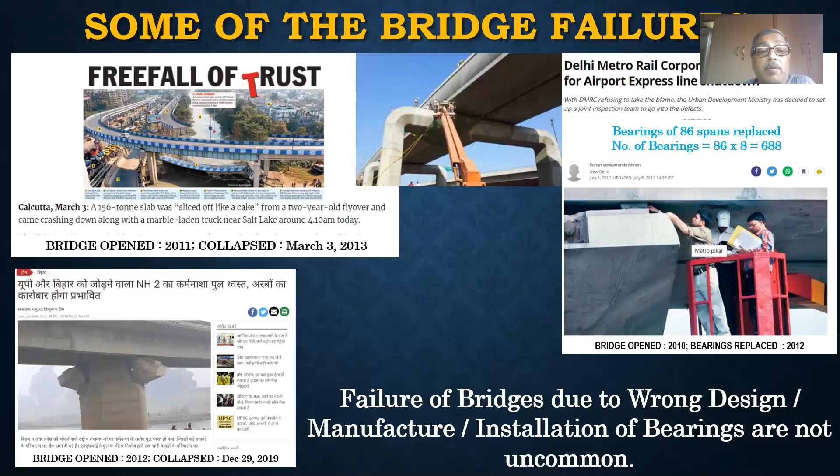Before I get into bearing failures, let me just gloss over the certain basics about bridge bearings.

The main function of the bridge bearing is to accommodate translation and rotation caused by the in-plane and out-of-plane movement and rotation of the superstructure due to various loads. Bearings transfer vertical and lateral loads from the superstructure to substructure and foundation, while releasing the translations and rotations. That is the main function of the bearing.

Vertical load will get transferred whether you have bearings or not. As an example, in buildings, we do not provide bearings in the majority of cases because the spans are of the order where the rotations and lateral loads caused by deformation are not so significant. But in bridges, where the spans are long, the rotations and translations are going to have significant effect on the substructure and foundation in case you do not release those deformations. And that is why the need for bearings.

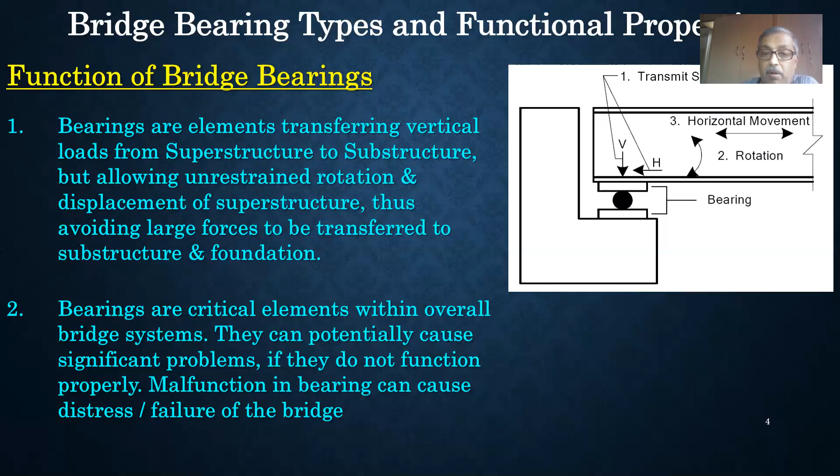The types of bridge bearings are many. Since the middle of the last century, many modern bearings have come in. Prior to that, most bridges used metallic rocker and roller bearings, but today rocker and roller bearings are becoming out of date, and other modern bearings called HLMR, that is high load multi rotational bearings, like pot bearings, disc bearings, spherical bearings, have come into existence and are performing well. We also have elastomeric bearings, which are very popular for short and medium span bridges.

And then we have special bearings, which are uplift bearings or restraint bearings, which help in better seismic resistance. And you also have isolation bearings, which are quite popularly used.

One thing I wish to tell you now is that the modern bridge bearings are far more complicated structures as compared to the historical ones. This is because, due to technological and scientific progress, these bearings can take much higher loads for a much smaller size, and therefore the stresses are quite high.

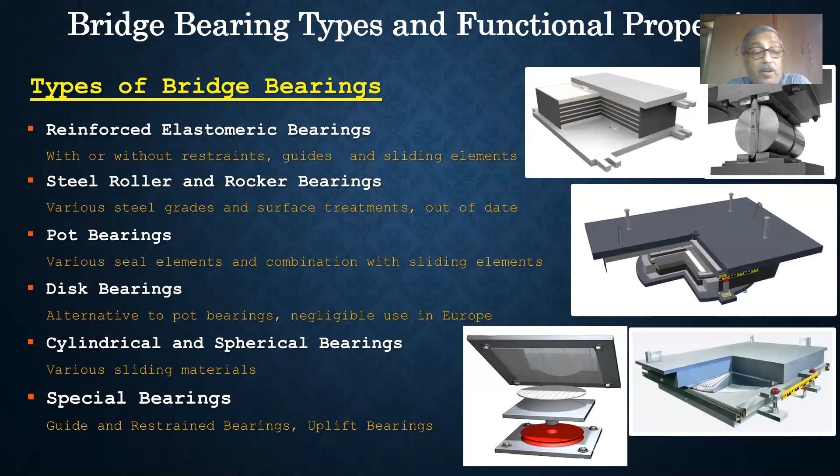Now these displacements can be achieved at the bearing locations by three mechanisms: one is sliding, one is rolling or rocking, and the third is deformation. A sliding mechanism would mean the provision of a sliding element like PTFE or UHMWPE, or any sliding material, by which the top part of the bearing, connected to the superstructure, will move without offering any resistance as compared to the bottom plate.

The second mechanism for displacement is a rolling mechanism, which is the concept used for rocker and roller bearings, where the top plate rolls over, and in the process the movement is allowed, and the roller also moves half the distance as compared to the movement of the superstructure, with the substructure being rigid.

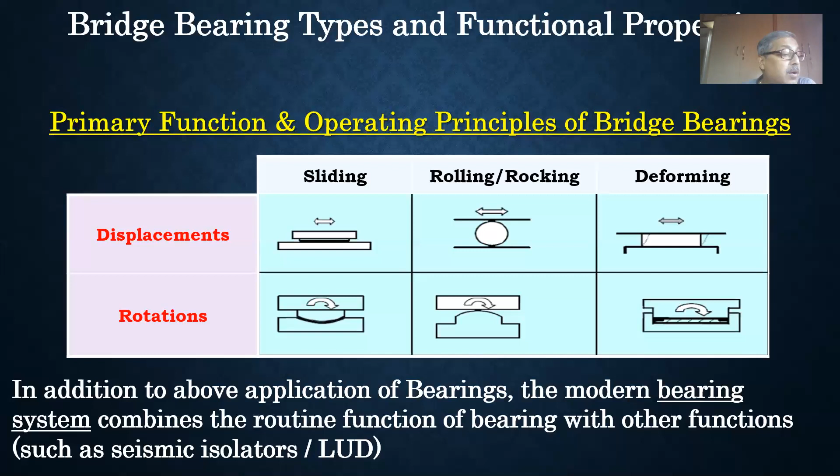These bearings were manufactured and fabricated in Germany under strict quality control. One problem with such size bearings is that they can never be replaced, unlike conventional bearings which are designed for replacement. So these bearings have to have the same design life as the existing bridge, and maybe a little more. Therefore, a very high level of quality control and precision is required in manufacture, installation, and maintenance of these bearings.

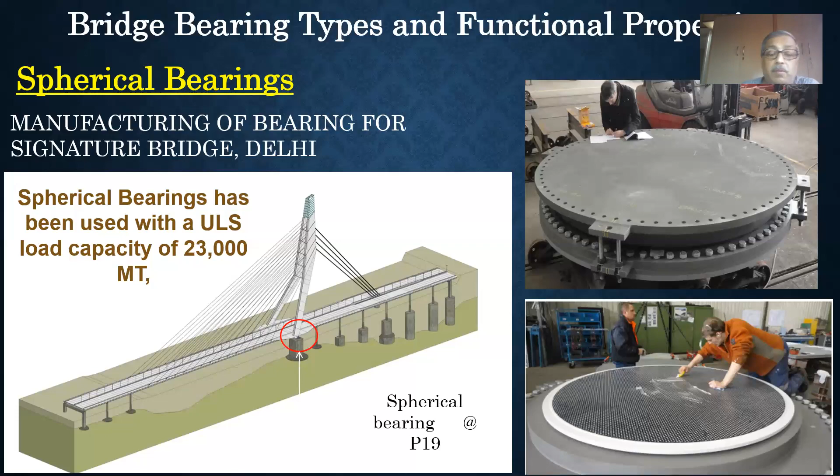Why should bearings have a higher margin of safety? I think this is an important point. Bearings, as we all know, are vital elements, and the cost of bearings is actually minuscule compared to the total cost of the bridge. Therefore it is always prudent to be a little liberal in designing bearings. They should be robust, and many times replacing a failed bearing costs much more than the original cost of the bearing. So bearings should be designed, manufactured, and installed with a lot of margin, so that there is no scope for error.

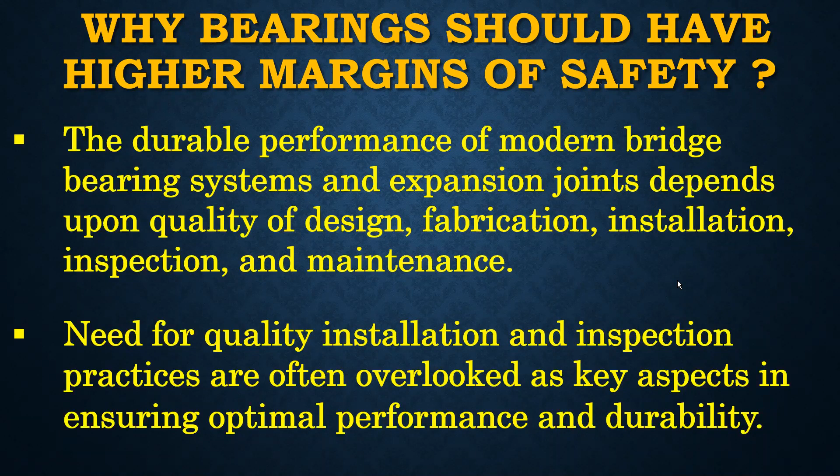The need for quality installation and inspection practices is often overlooked, and this is the main problem because of which bearings become the reason for failure of bridges many times.

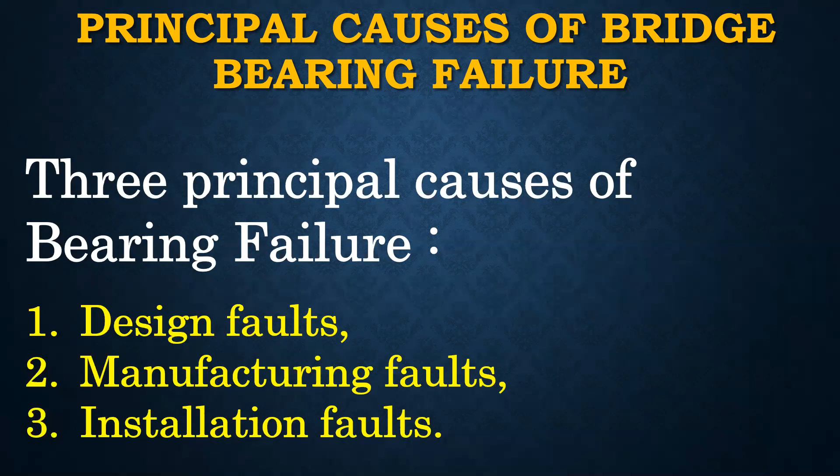Now let us come to the details of my presentation. The principal causes of bridge bearing failures can really be divided into three groups: one is the design fault, second could be the manufacturing fault, and third is the fault due to faulty installation.

Now let us come to the design fault. This could be primarily due to three reasons. One is lack of experience on the part of the designer and reviewer. Unfortunately, not many literatures and books are available in the market which explain in detail the do's and don'ts in case of bearing design. So there is a fair chance that the design forces, movements, and rotations are underestimated by the designer, which results in faulty design of bearings.

Incidentally, the design of the bearing is done by two independent organizations. One is the design done by the bridge designer who is involved in the bridge project; he or she estimates the design forces, movements, and rotations, and prepares the bearing layout. This drawing is passed on to the bearing manufacturer or vendor, who does the detailed design of the bearing, and based on this detailed design, the bearings are manufactured and installed.

The second possibility could be improper choice of the bearing type itself, meaning the layout of the bearing is faulty. Also, a faulty bearing layout in the plan of the bridge structure can cause serious issues.

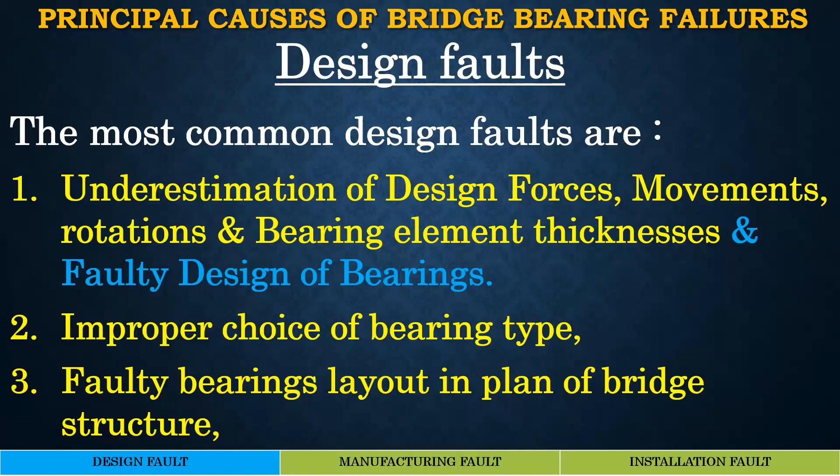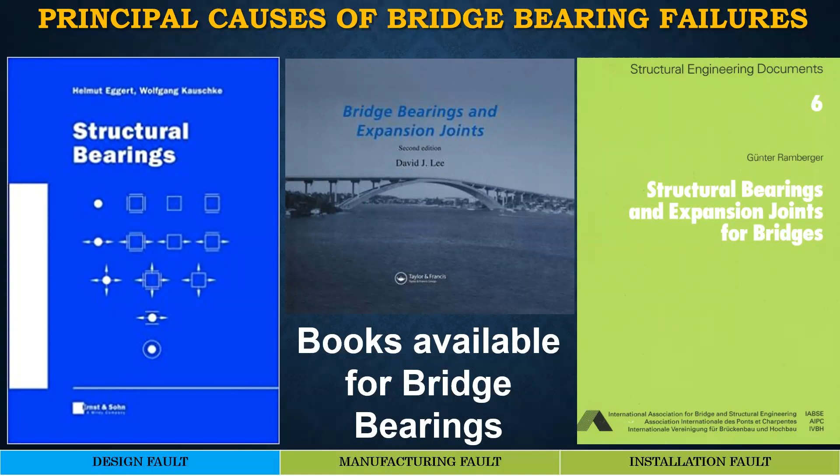So, regarding underestimation of design forces and dimensions, there are many good examples. One good example is the collapse of Surat flyover, a classic example of wrong design, which led to failure during construction itself. This flyover collapsed in June 2014, killing about 10 people.

It was a simply supported curved bridge of very sharp radius. The first mistake was to have a simply supported span for such sharp curvature - that is not recommended at all. When you have a curved span, normally the good practice is to have a continuous structure rather than a simply supported one.

But having conceived it as a simply supported structure, the design should have ensured equilibrium and correct estimation of forces. In this case, after the collapse, detailed investigation revealed that the designer simply designed this curved bridge as a straight bridge, calculated the forces, and at the end added 25% to account for curvature.

This is a gross error because the behavior of a curved structure is entirely different from a straight bridge. In the curved superstructure, the forces in the bearings were coming out negative, meaning you had to anchor the bearing - provide a tensile bearing to hold it against toppling. Instead, designing it as a straight bridge gives compressive force, and adding 25% means you've provided a completely different type of bearing than required.

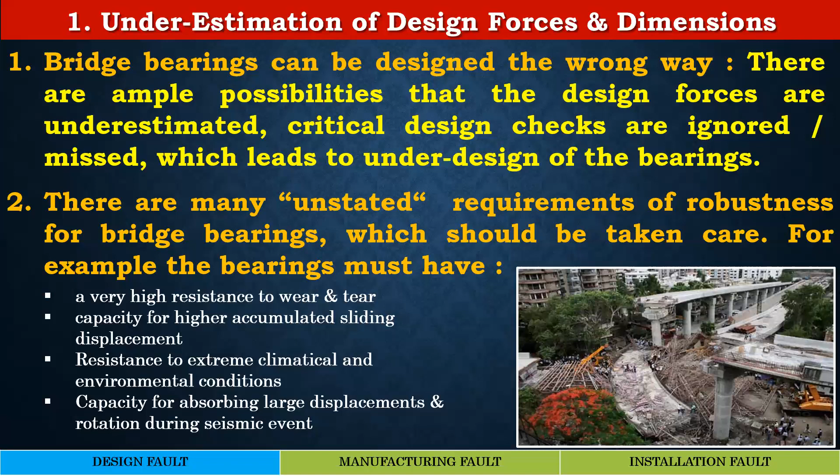Another example is long span bridges, particularly where you have a central hinge. Oftentimes I found the estimation of rotation for the design of bearing is underestimated. When you have a central hinge for a long span bridge, it has to cater for double rotation - rotation from the two ends - and these rotations must account not only for live loads but also the creep effect of dead load, pre-stress, etc.

This calculation is quite complex. In many occasions, I found these calculations to be grossly in error, and proper estimation increases the rotation by many fold. So it's very important that these are assessed properly.

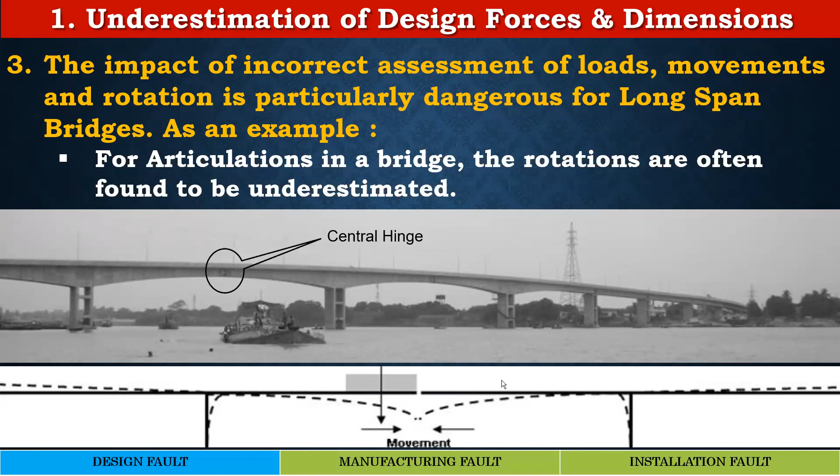When it comes to long span, I'm again showing you slides of Signature Bridge Delhi, because in bridges of long spans, the forces and rotations are of very high magnitude. The chances of error are also very high, and considering the sensitivity of this element, as the span increases or as the load on the bearing increases, the degree of checking and review required increases in the same proportion.

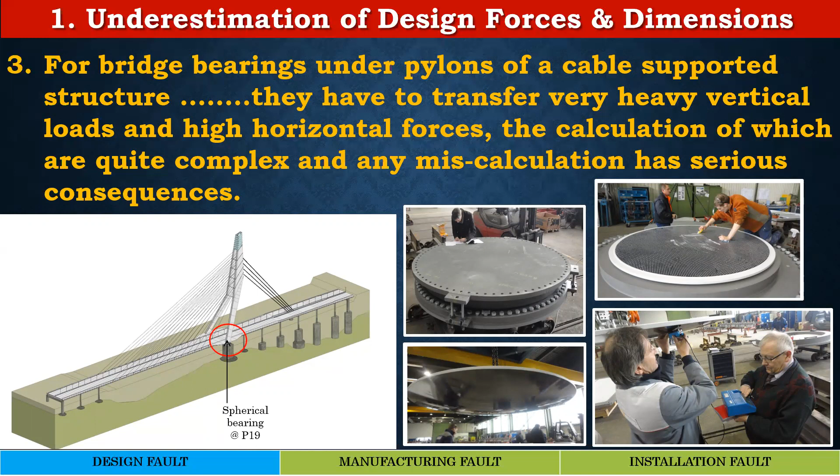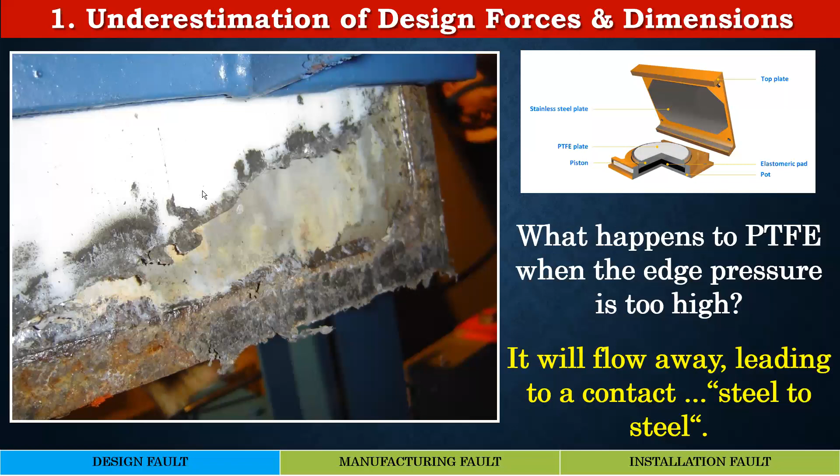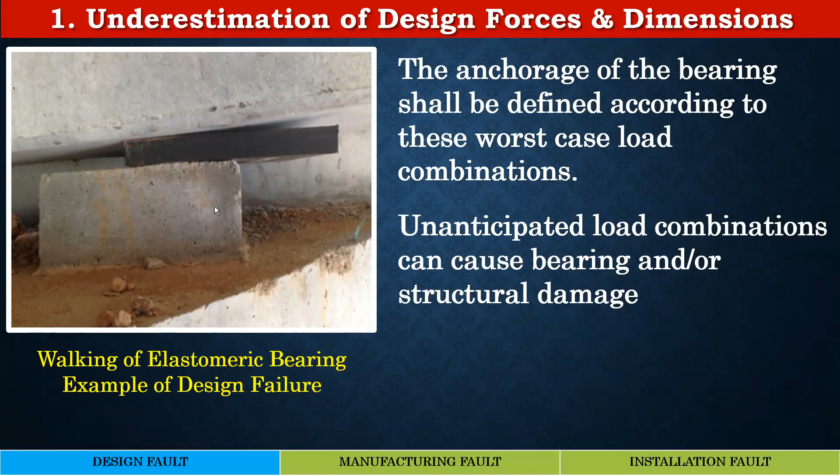This is another example of underestimation of design force leading to failure. Here you can see the elastomeric pad simply walking away. This happens when the minimum load is very low, and the friction between the elastomer and concrete depends on the vertical load - the lower the load, the less the friction. So this is a scenario where if you overestimate the minimum load, there's a problem of the elastomeric bearing walking away, and this is one such example.

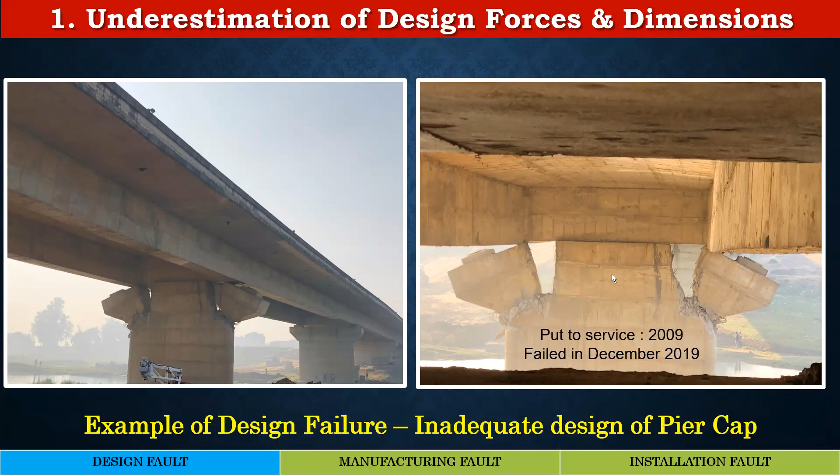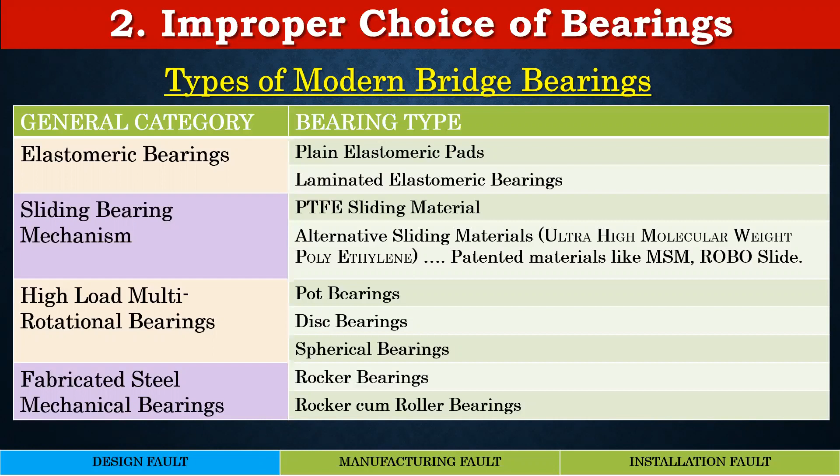The types of modern bearings can be broken up into three parts. One is the elastomeric bearing. Every kind of bearing has its own range of application - for example, elastomeric bearings are meant for short and medium span bridges. The second category is the high load multi-rotational bearings, which comprise pot bearings, disc bearings, or spherical bearings. They are used for medium and large spans across a wide range of load brackets. The third is the metallic roller and rocker bearings, which have limited application in today's scenario.

The choice of bearing depends on many factors, like the type of structure - whether it is highway or railway - what is the total magnitude of vertical load, maximum and minimum, what is the maximum rotation, and what is the horizontal displacement, environment, economics, and structural arrangement.

There are many examples of bridges where the wrong choice of bearing has been adopted, which subsequently led to problems. As an example, in all the recent expressway projects in India, spherical bearings are abundantly used even for short spans of 15 meters, 12 meters or so. This is being done since one of the IRC manuals for 6-laning expressways mentions a design service life of 50 years for bearings. I think this is not the correct application, and depending upon the span and the load, the appropriate bearing should actually be chosen.

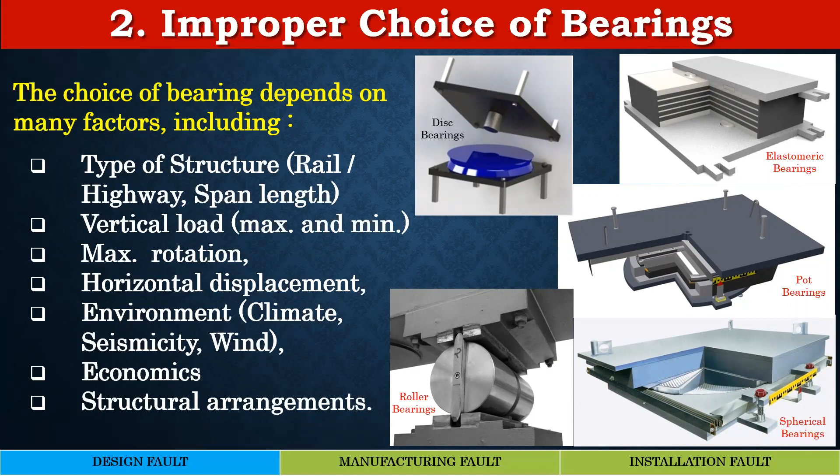This is one guideline which tells you what kind of bearings should be selected under what circumstances, for what vertical load range and what capacity. It's a fairly good table which helps beginners decide on the type of bearing to be proposed, depending upon the vertical load range, the rotation, the translations, and the geometry.

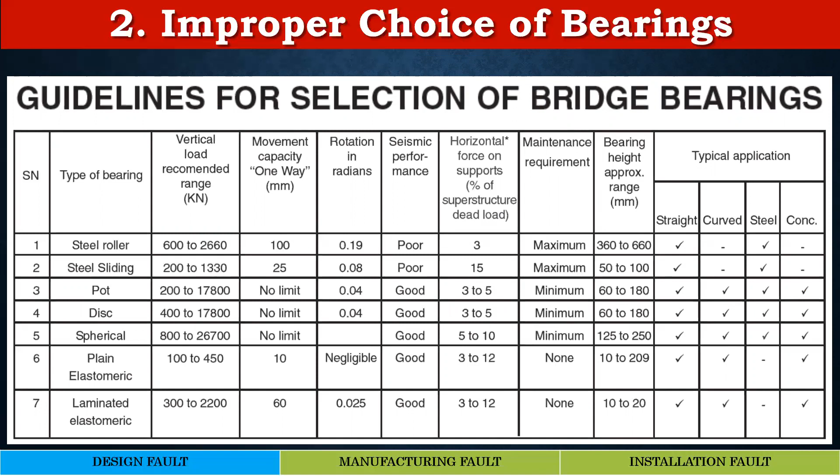Now let me come to the faulty layout plan of bearings, which could be one of the reasons for failure. There are several bearing layouts. Let me first start with simply supported spans - there are several bearing layouts for simply supported spans which are in practice. Not all of them, however, are desirable, and some suffer from serious drawbacks.

Unfortunately, we do not have any guidelines so far in IRC which guide the designer in choosing a particular type of bearing layout, and it is all left to the ingenuity and experience of the designer performing the design. The fundamental principle in fixing the bearing layout is essentially to ensure that the load transfer from superstructure to substructure is symmetric and the locked-in stresses are reduced to a minimum.

You can see there are so many possibilities that exist. For example, if you have a narrow deck - meaning a 2-lane or 3-lane bridge - you will normally have two bearings on each line, one at the fixed end: a fixed bearing and a metallic guided bearing. On the other end, the free end, you will have a metallic guided bearing and a free bearing. This is one possibility. Another possibility is to have the vertical loads taken by 4 sets of bearings, with the lateral load segregated using a pin bearing and a metallic guided bearing. A third option could be to have a free bearing instead of a guided bearing on one side. Now let us go into the details as to which one should be done.

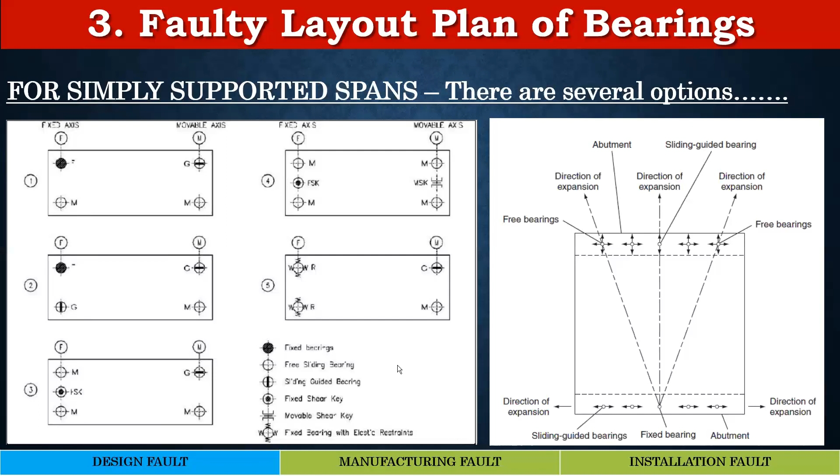Let's take the case very often used by many designers without questioning: a layout where a fixed bearing is used at one end, and a metallic guided bearing, which allows translation in the transverse direction, is used here. On the free end, you have a guided bearing which allows longitudinal translation, and a free bearing. Now this is a very classical approach, but it suffers from some drawbacks. Number one, the sharing of lateral load between the two bearings is never uniform, because the fixed bearing and the guided bearings have different tolerances, and therefore when the lateral load comes, the share is never equal.

All the loads will be taken by the fixed bearing, and only when there is a deformation of the fixed bearing will the other bearing start effectively sharing the load. So this is one drawback. The second drawback is that horizontal forces in the cross direction due to wind or temperature difference can cause horizontal restraint forces where the deflected pattern is not symmetric, and this is also a disadvantage.

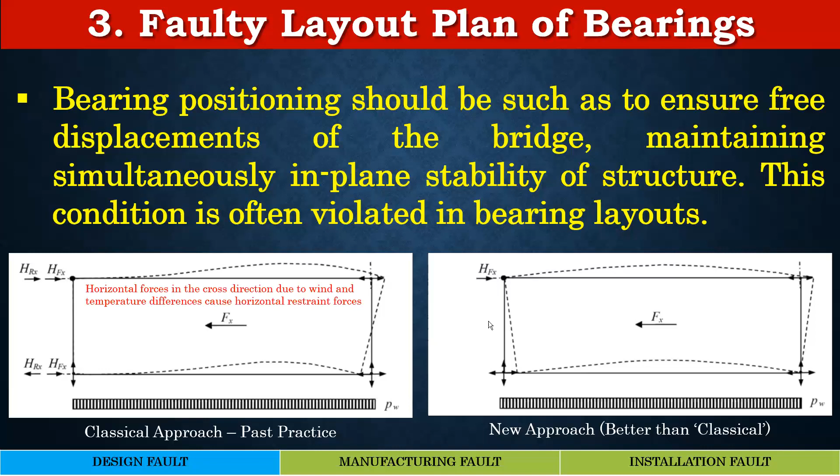The best solution would be to have free bearings at the ends and a central pin bearing and a metallic guided bearing. In the previous option, if you have the entire lateral load taken by the fixed bearing, this will lead to some torsional forces in the substructure and foundation, which is not desirable. But in this case, you can probably avoid the torsion in the substructure and foundation. So this is a better option.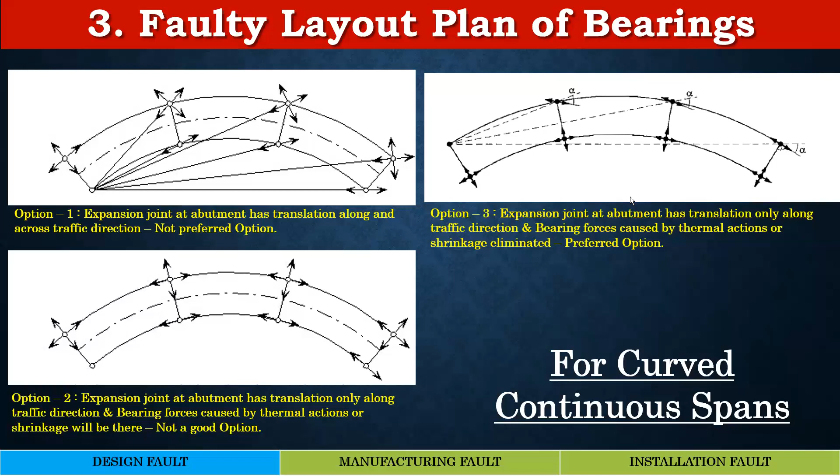Another problem we face in bearing design is the faulty fixing detail of the bearing. We have seen on many occasions that the designer simply designs the bearing, and when it comes to the detailing of the superstructure at the junction of bearing and superstructure, or detailing of the pedestal, the interface is simply forgotten about. This is a very serious issue.

So the lesson learned here is that the designer of the bearing must also ensure that the connection of the bearing to the superstructure and the pedestal duly takes into account the fixing arrangement of the bearing with the superstructure and the pedestal.

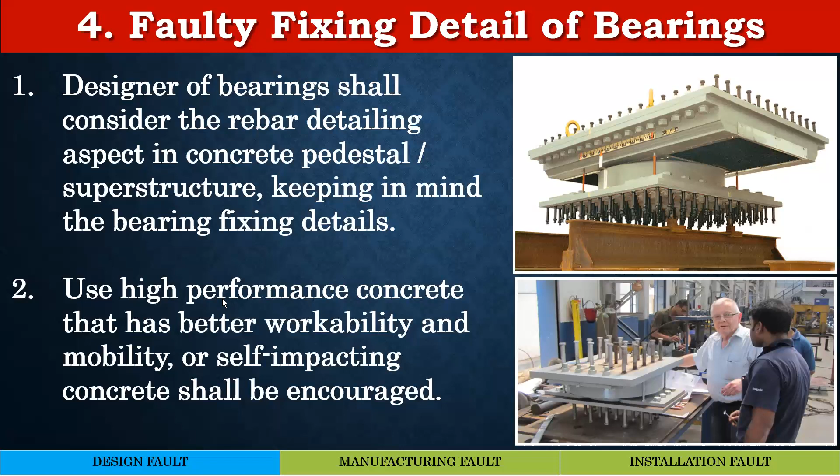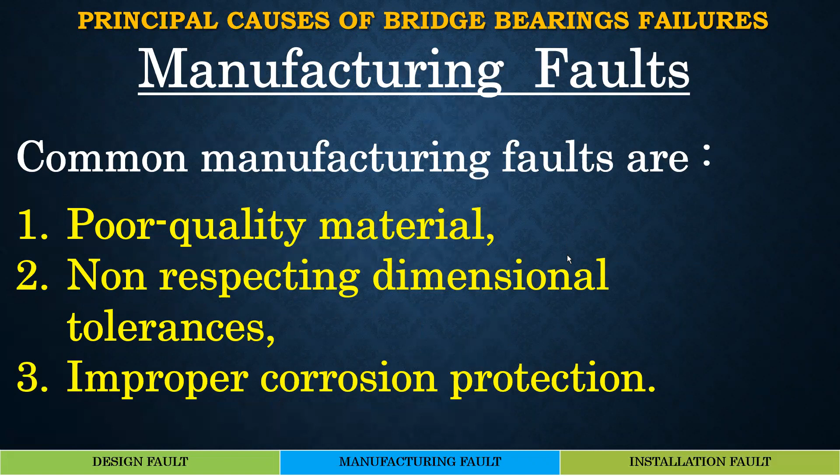Now let us come to the second part, which is the manufacturing fault that causes bearing failure. Manufacturing fault can be because of poor quality of material, non-respecting dimensional tolerance, or improper corrosion protection. Poor quality of material refers mostly to elastomeric bearings, which are made of compounds containing a great variety of components. As far as metallic bearings are concerned, the quality issues of the material per se do not really come into the picture.

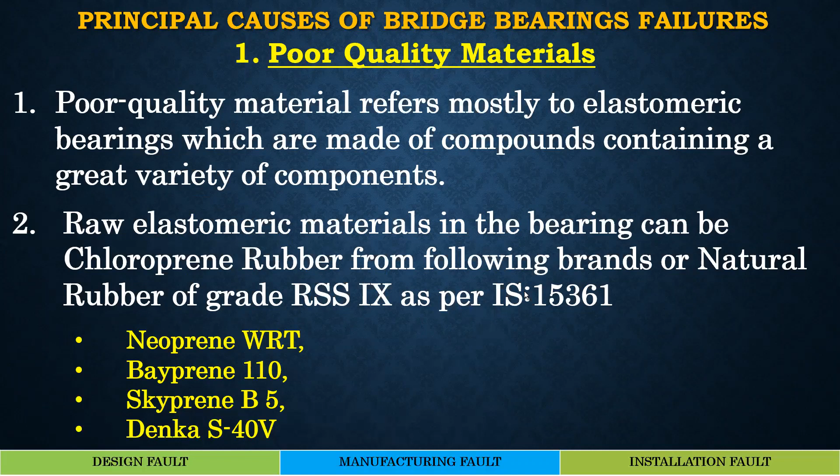Raw elastomeric material in the bearing can be chloroprene rubber or natural rubber of different grades, as mentioned in the code. The effective use of rubber as an engineering material depends on understanding its behavior and chemical composition. Unfortunately, we as structural or bridge engineers have very little idea about rubber technology, whereas elastomeric bearing manufacturing involves a lot of rubber technology, where the properties we achieve depend on a complex composition of materials combined here, but that is an area which is Greek to civil and structural engineers.

What we need to understand regarding elastomeric bearings is that it's a viscoelastic material. It is neither elastic nor plastic, and we need to know a little bit about what viscoelastic material is. Normally the steel and concrete we deal with in the normal force-stress range are elastic. That means within the elastic range, stress is proportional to strain, and when you release the force, it comes back with no plastic deformation.

If it is a plastic material, when you release the force, there is no regain of the strain, and the strain is permanent. When you talk of elastic-plastic material like metals, once the yield point is crossed, if you release, there will be some permanent strain, inelastic strain.

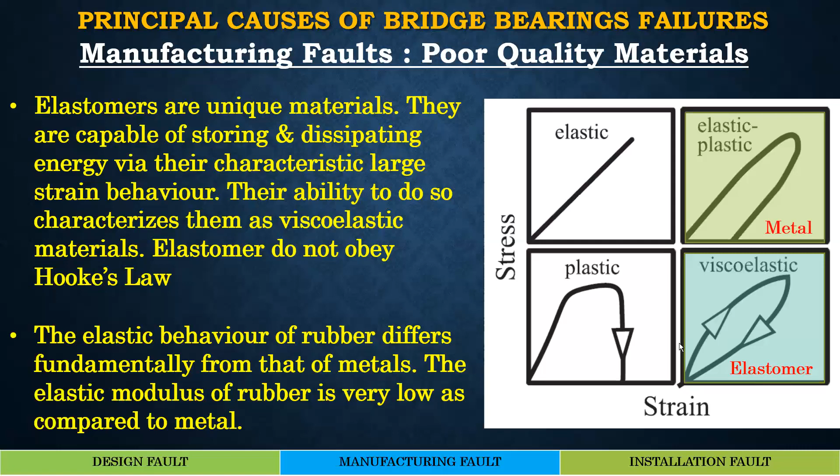Elastomers are a complex polymer compound which has mechanical properties that are sensitive to changes in compounding and vulcanization process. They are flexible in shear and in uniaxial tension or compression, but very stiff in its volumetric deformation. The material properties are non-linear and time-temperature dependent. Thus, factors such as creep and low temperature stiffening are important to the designer.

The problem with elastomer bearing manufacture is that they have a large mass of rubber, and it is difficult to get a uniform cure throughout the cross section. The vulcanization process has to be very controlled. If it is too long, the outer edges of the pad become brittle due to overcuring. Conversely, if the curing process is cut short, the center of the pad remains uncured, resulting in excessive deflection under sustained load.

Now, the elastomeric bearing is one such material which, if done properly, is in fact one of the best bearing types, which has very good resistance against earthquake, and therefore I would strongly recommend use of elastomeric bearing to the maximum extent possible, as long as you are able to satisfy all the requirements.

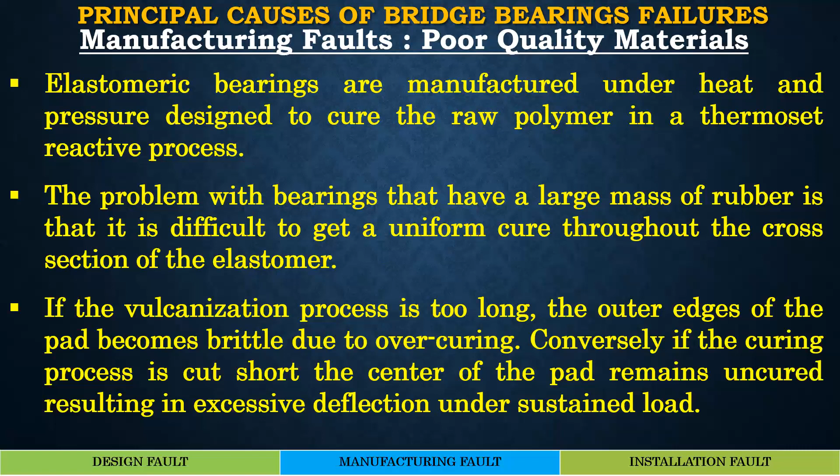Bottom line, as far as structural engineers are concerned, because we are not rubber technologists, we structural engineers only understand the few physical properties which influence the behavior of elastomeric bearing. So we only see the end product and compare its hardness, its tensile strength, its elongation at break, and compression set, and decide whether the elastomer is performing or non-performing. So these are the end requirements of structural engineer from the elastomeric bearing. But I would wish that a bit of rubber technology, structural engineers involved in bearing design should know, because that helps them to inspect and accept or reject a material.

When you are selecting a raw material, when you are inspecting the quality assurance or factory production control, or accepting the bearing, a little bit of knowledge about the technology of rubber and composition helps a great deal.

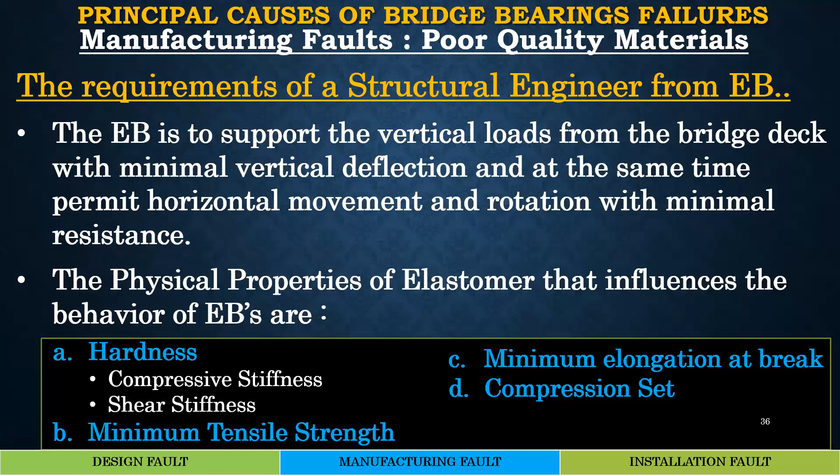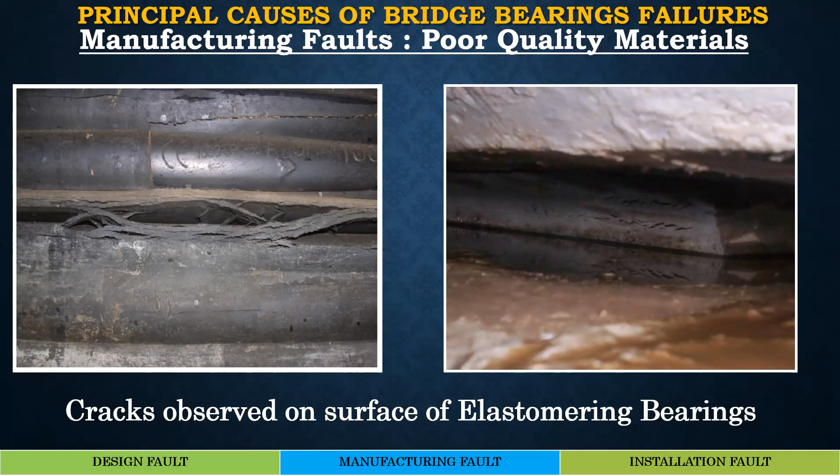Coming to the failure of non-respecting dimensions and tolerance for metallic bearings, we can see that non-respecting dimensional tolerance is a common fault in case of metallic bearings. Some tolerances are very important for reliable bearing behavior. They concern mostly the mechanical bearings.

The gap in the PTFE sheet recess should not exceed 0.6 millimeter in common situations. Otherwise, the PTFE sheet can be easily extruded from its recess during the bridge span movement, as you can see in this particular sketch. Very important in the bearing sliding element is proper choice of PTFE sheet, lubricating agent, and respecting roughness limits for sliding surface and mating element.

All that is not covered in great detail in the codes, but I think experienced vendors and experienced inspectors of bridge bearings would know. Many times, due to lack of dimples in the PTFE sheet, and additionally the use of silicone oil in place of silicone grease, the frictional resistance can be as high as 10 times more than the case of properly chosen material, which can lead to failure.

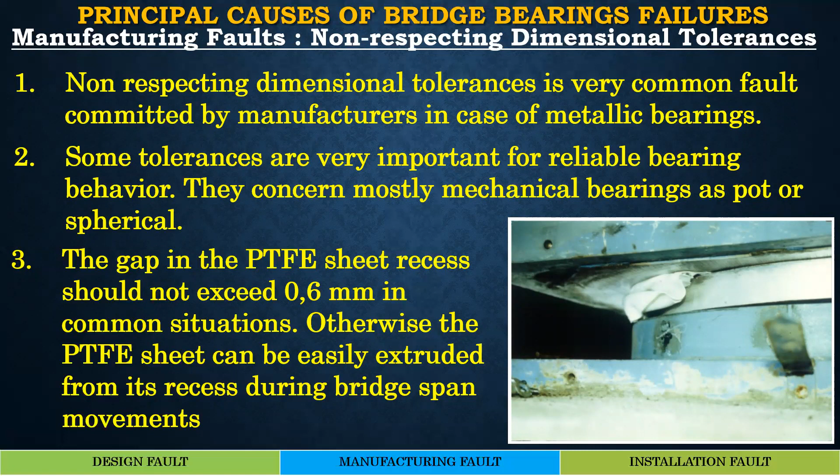Sometimes it happens that the vertical clearance in the guide channel between the central shear key and the upper sliding plate is insufficient, and the shear key is immobilized, and its linking bolts are cut. As PTFE sheet is subject to wear during the bearing movement, its depth becomes lower and lower, and this is a reason why the clearance between these two elements should be designed with sufficient gap.

Otherwise, the elastomer pad can be extruded through the gap between these two elements, as can be seen in these two sketches.

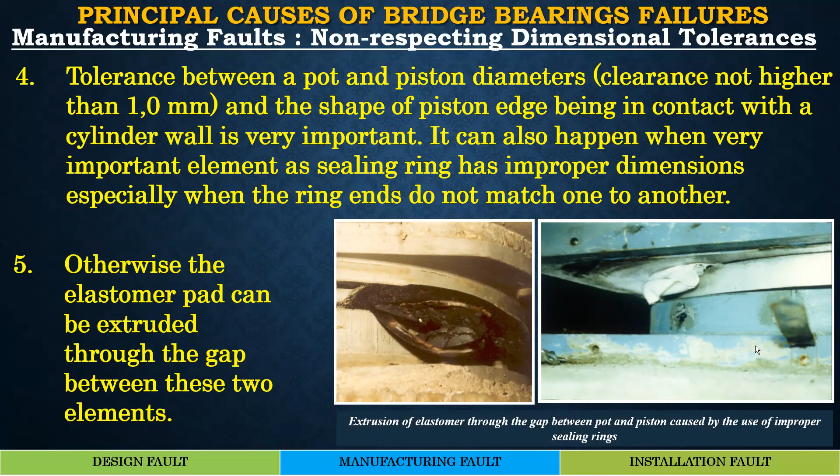There is also a possibility of elastomeric pad extrusion when there is excessive deformation caused by high horizontal lateral forces during construction. As I explained earlier, if proper care is not taken during the construction stage, the bearing forces and lateral loads can increase to a very large extent, and that can cause failure of the bearing during construction stage itself, as you can see in this particular slide.

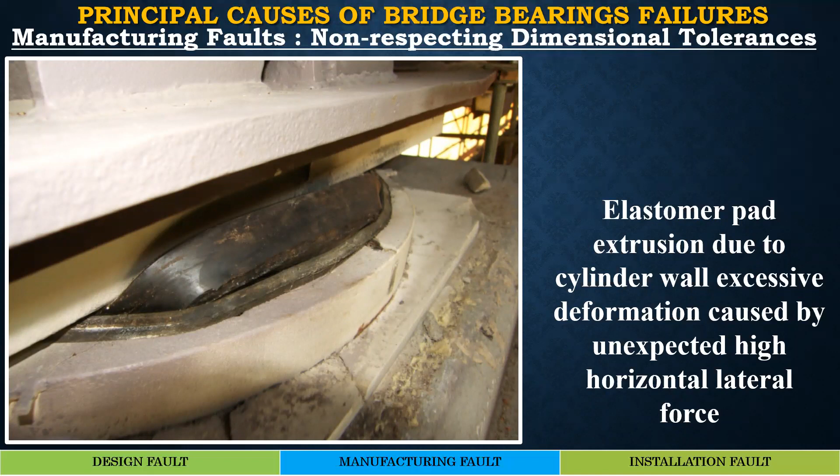Sliding element and sealing ring in pot bearings, as well as shear keys in all guide bearings, are the most vulnerable parts of pot bearing. Many a times

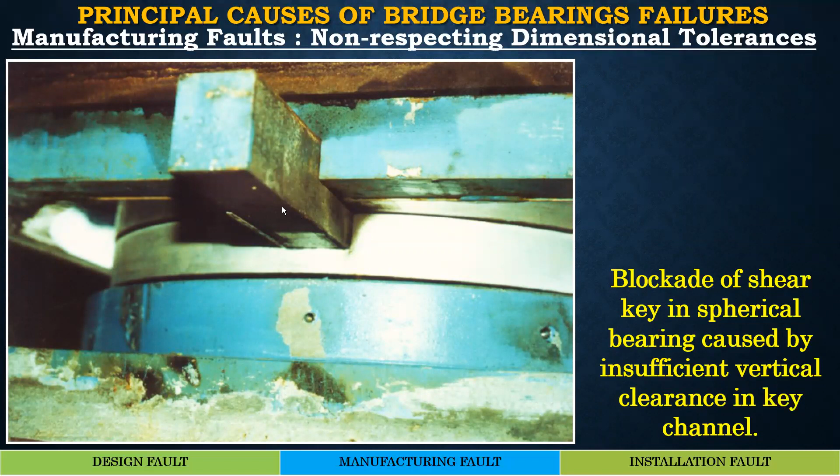there can be locking because of the lack of adequate clearances, which can cause blocking of the shear key. What you see here is that there is no gap. There should be a gap here to allow free sliding of the top plate with respect to the bottom plate. This is not happening here because adequate clearances are not given.

Now, coming to corrosion protection, this slide shows that the painting in the superstructure and the pedestal has covered the elastomeric bearing also, which is totally unacceptable.

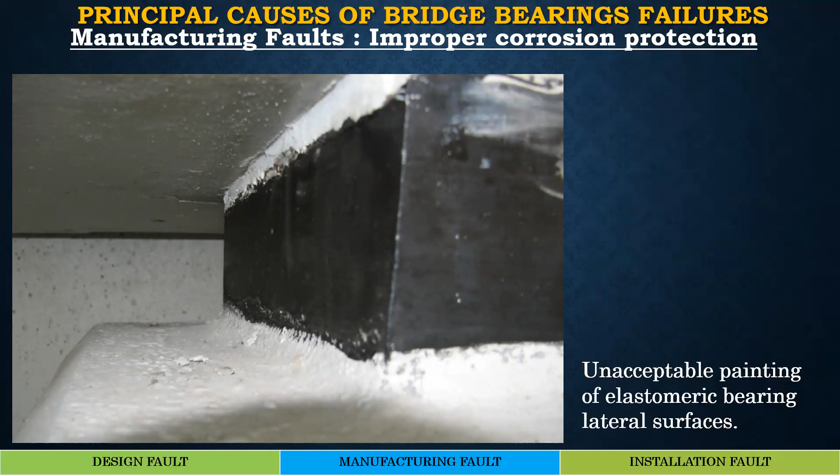For elastomer, every paint cover may be very dangerous for material behavior, especially when it contains aggressive agents for the rubber. Sometimes painting cover is used as a mask hiding cracks on the elastomer surface, and that should be prohibited. One must be aware that when it comes to elastomeric bearings, no painting should be done on top of that, even to hide anything, and that is completely strict no.

For metallic bearings' corrosion protection, there are several factors which account for the life of the paint film. Some research in the US has shown that whatever painting we do for metallic bearings, 50% of the life of a paint film depends on the surface treatment, 20% on the thickness of the paint film, 5% on the paint type, and 25% on all other factors such as construction, environment, steel surface conditions, etc.

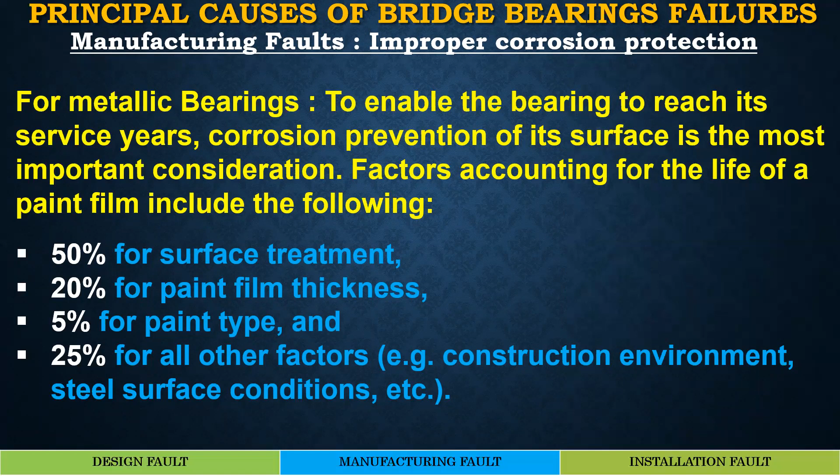Just to give an example, sandblasting is what is conventionally done as a surface treatment for metallic parts, but the recent trend is to provide water jetting, which is far better, and in fact it is a better proposition than sandblasting.

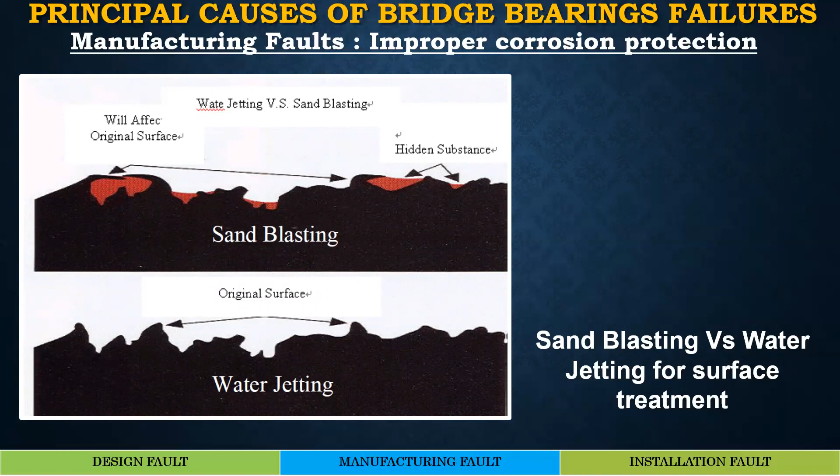These are issues which need to be taken into account in the manufacture and corrosion protection of bearings. Surface treatment using ultra high pressure water jetting employs pressure of about 172 MPa, that is 25,000 psi, and this is a much better alternative than use of sandblasting.

Coming to the last part, which is installation faults, there could be several reasons for faulty installation: lack of clamping device or leaving the clamping device after installation, installation of bearing before completion of the bridge structure, lack of bedding material, wrong installation and non-respecting installation tolerances, non-parallelism of contact surfaces, wrong pre-setting of bearings. These are the seven reasons.

These are common installation faults, which if we can avoid, we can prevent failure of the bridge bearings. So let us go one by one, on this lack of clamping device or leaving the clamping devices after installation. So what you see here is the failure of the bearing due to lack of clamping device.

The pot bearing is an assemblage of various components which is put one over the other, and if they are installed keeping these tolerances as it is, only then it will function. Now the clamping device helps to keep all this assemblage intact. So during transportation and installation, that should not get disturbed. But in this case, because no clamping devices were there, you can see that during the installation itself, half the things are coming out, causing failure.

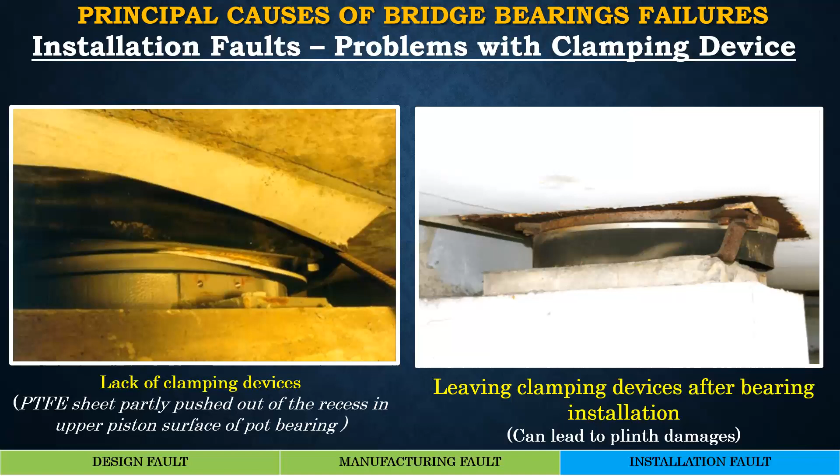These are again some examples of poor installation due to either lack of clamping device or not removing the clamping devices. This is a failure due to wrong orientation and unreleased transportation bolt. You can see leveling and general installation failures here.

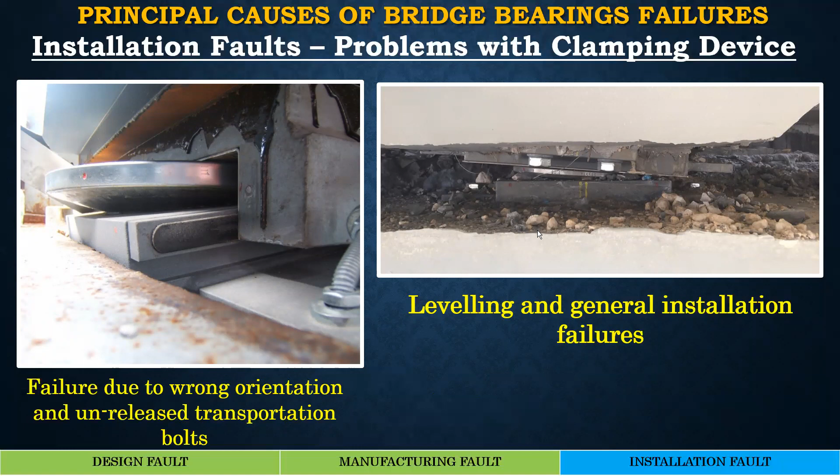This is a fixed bearing which was designed, which was at the abutment and designed for the service stage, where all the other supports were supposed to be free against any translation for temperature movements, etc.

But during construction, this superstructure was on staging, and they were fixed at not one point but another point as well, and due to which the forces were almost 10 to 12 times the design force, and that caused the failure of the system.

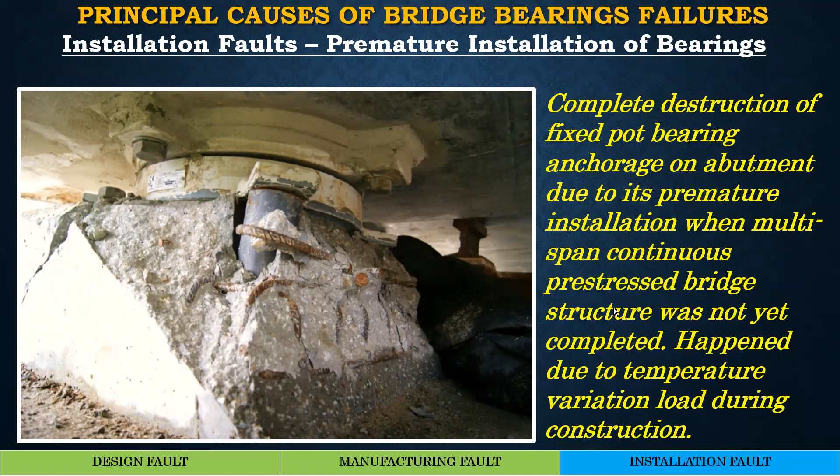This is another very good example of a failure of a bearing during installation. This is a steel concrete composite bridge, 5-span continuous, and the stage of correct construction was that first the steel girders were installed, and then the top deck slab was cast in phases.

Now, unfortunately, the permanent bearings were fixed after the erection of the plate girder, whereas actually the permanent bearing should have been installed later.

But the fallout of this was that during the stage construction, at one point of time when the deck slab was cast up to stage 5, since the plate girder weight is much less compared to the weight of the deck slab, there was an uplift, and the top plate and the PTFE stuck to the top plate got lifted up.

Then before the next load came, there was a temperature variation, and that caused the top plate and the PTFE to move with respect to the bottom plate. And when stage 8 and stage 7 was done, it rested at a different position, causing collapse.

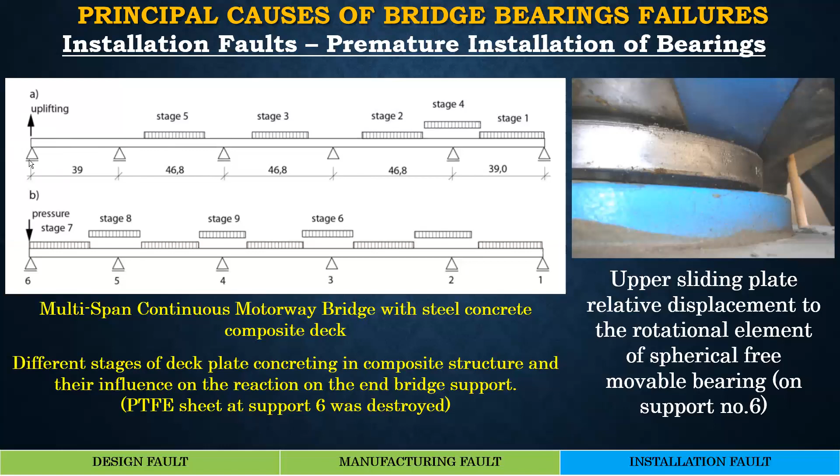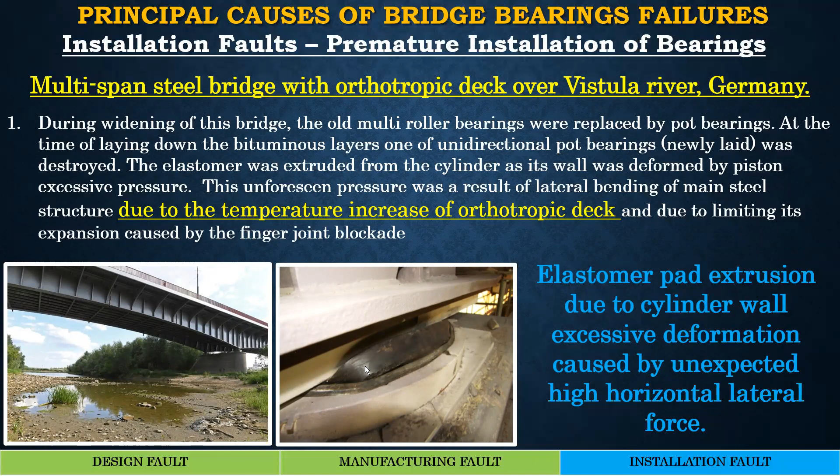This is another failure of the elastomer, I think I have shown this slide earlier also. This is an elastomeric pad extrusion due to excessive deformation caused by high horizontal lateral load during construction. As I mentioned, during construction, if you do not release the forces properly, and if it causes very high forces, then it can cause collapse of the bearing.

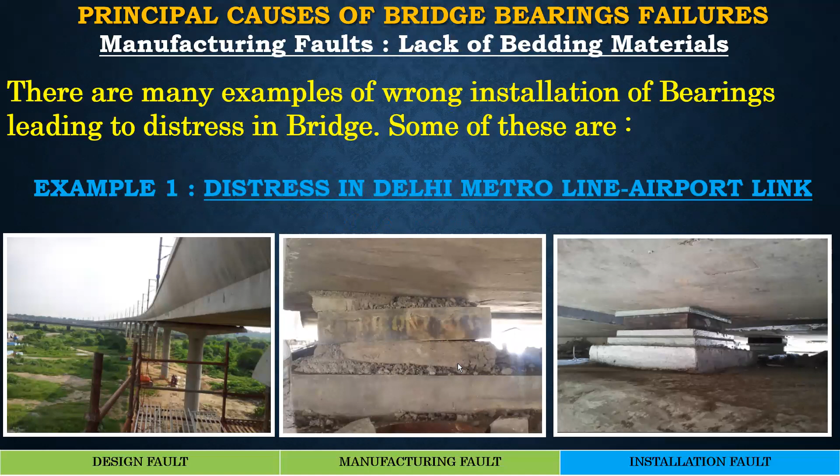Wrong installation and not respecting erection installation tolerances. I think I mentioned the Ultadanga flyover collapse earlier. This is a glaring example of an interchanged bearing causing overturning.

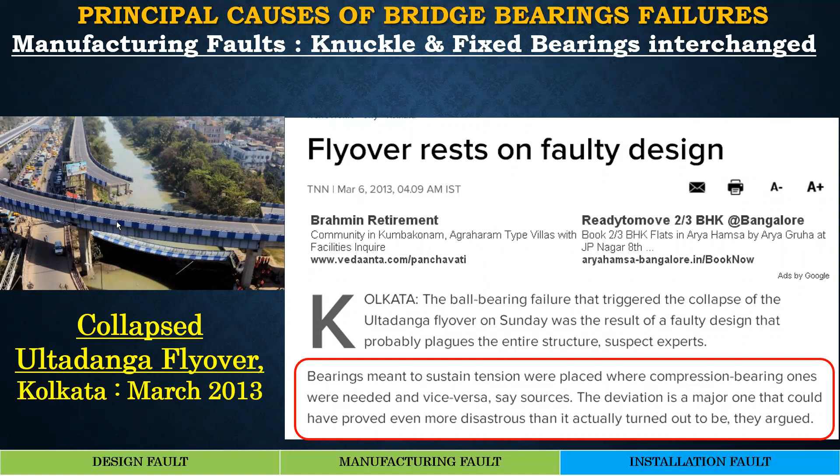Another example is a bridge at Goa, the Gaundalim Bridge, Goa, which I had inspected for some tilting of the top arch. But while inspecting the bridge, suddenly I found that the bearing at the fixed end, which was supposed to be aligned towards the transverse direction, was actually aligned in the reverse direction. These kinds of errors are not uncommon in India, I can tell you.

This shows that there is a need for a very high degree of quality control in bearing installation.

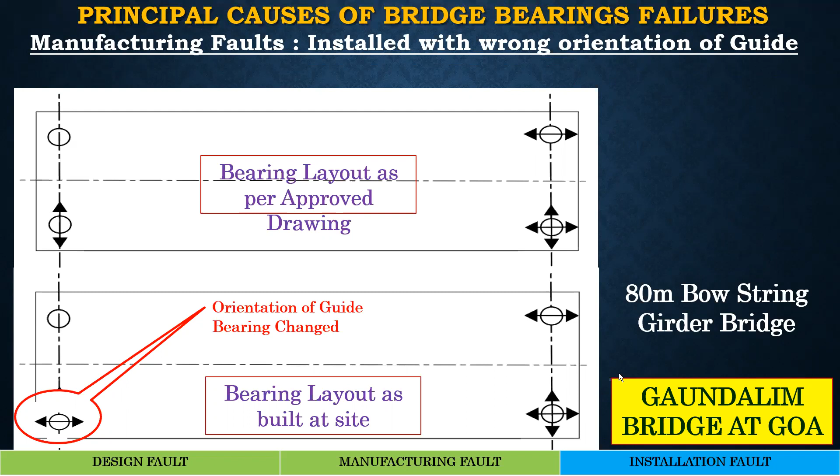It's not just the authority engineer. The drawing shows this only, by the way. It is not a mistake in the design here. It is the mistake of translating the information given in the design at site, and poor supervision by the concerned independent authority engineer.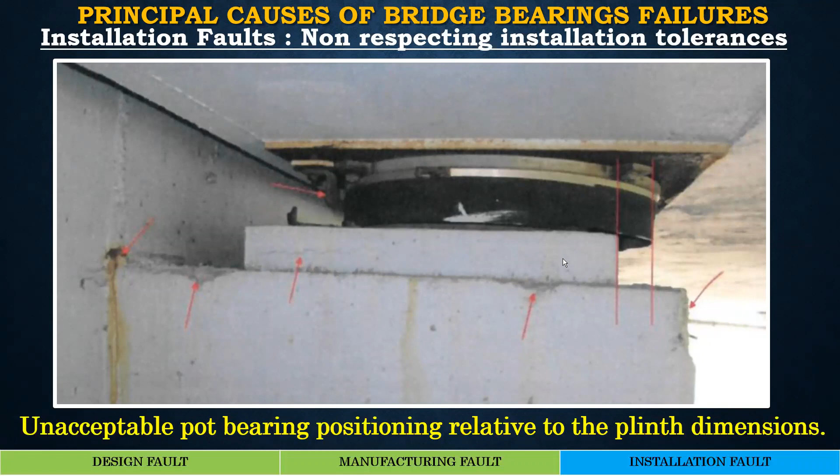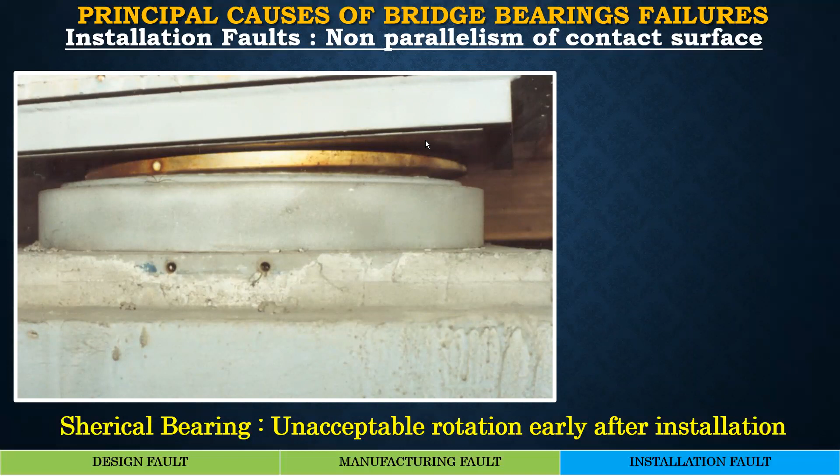Coming to non-parallelism of contact surfaces, spherical bearings - you can see in this slide that if your top and bottom surfaces are not parallel and not leveled, it can cause at the installation stage itself an unacceptable rotation. You can see the top plate is already rotated by a very large angle here, which is unacceptable.

Wrong presetting of bearings. Presetting of sliding element bearings used to be a practice, and I think it is still practiced by some people. It is done to reduce the design movement and range of capacity of the bearings. The top plate of the bearing should be large enough to accommodate translations due to creep, shrinkage, temperature, etc. The inward movement is always larger than the outward movement, because outward movement is caused by temperature alone, whereas inward movement is because of temperature plus creep plus shrinkage.

So therefore, there is always a tendency, in order to reduce the size of the top plate, to do pre-setting - which means that 50% of the movement caused due to shrinkage and creep is absorbed by pre-setting the top plate of the bearing. Now, the risk of pre-setting is that if the installation is done improperly, it can play havoc.

As an example, you can see here this pre-setted bearing, where the top plate has a very large allowance here and a small allowance here, and actually this should have been done the other way around. That means the large gap should have been here and the small gap should have been here, because this is the inward side. So such a mistake in installation can cause havoc.

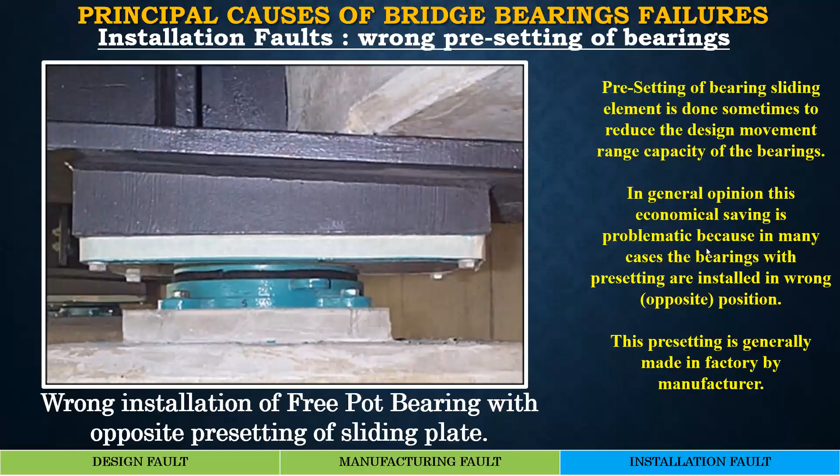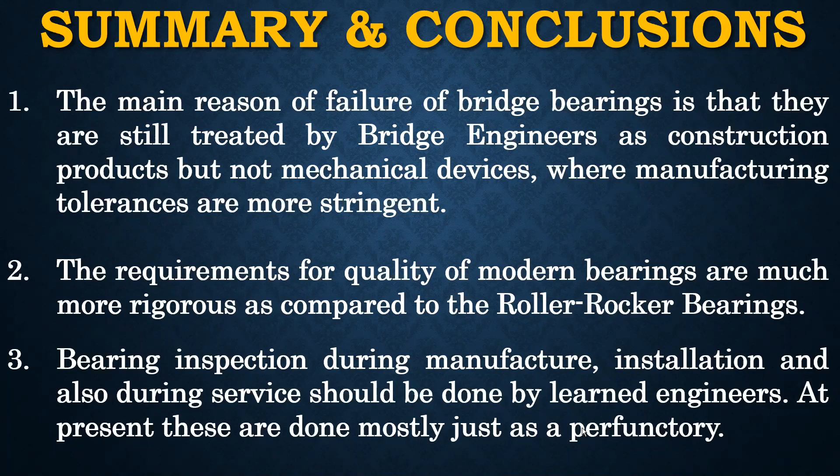So I've come to the end of my presentation. To summarize, the main reason for failure of bridge bearings is that they are still treated by bridge engineers as construction products, but not mechanical devices, where manufacturing tolerances are more stringent. The requirements for quality of modern bearings are much more rigorous compared to roller rocker bearings. Bearing inspection during manufacture, installation, and service should be done by learned engineers. At present, this is done mostly as a perfunctory exercise.

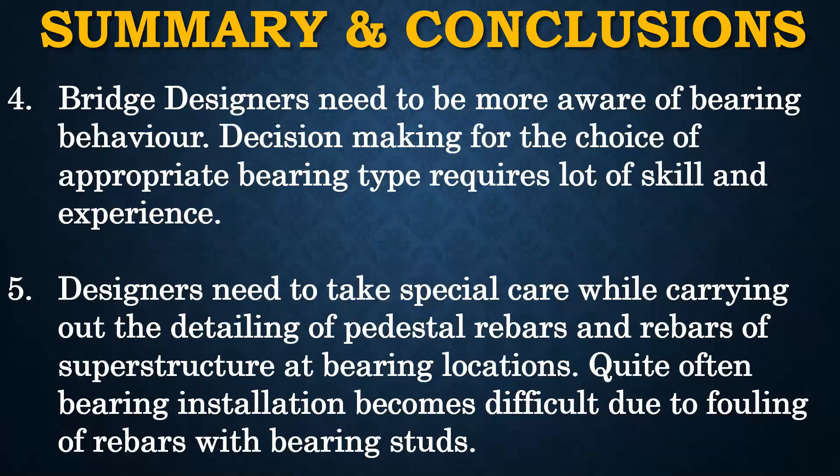Bridge designers need to be more aware of bearing behavior. Decision making for the choice of appropriate bearing type requires a lot of skill and experience. Designers need to take special care while detailing pedestal rebars and superstructure rebars at bearing locations. Quite often, bearing installation becomes difficult due to fouling of rebars with the bearing studs. Clamping devices should be very firmly attached with the bearing parts and left in position till the very end of bearing installation. These devices should be removed when the bearing becomes functional.

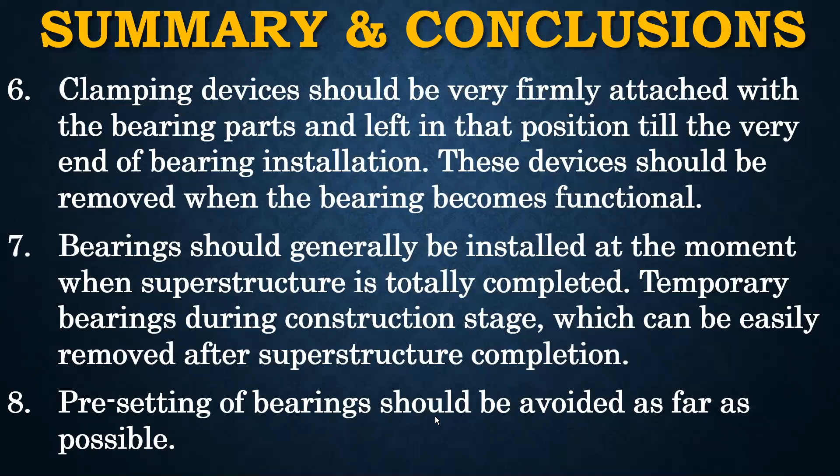Bearings should generally be installed at the moment when the superstructure is totally completed. Temporary bearings during the construction stage, which can be easily removed after superstructure completion, should be followed. Pre-setting of bearings should be avoided as far as possible. It is recommended that bearings be installed under the supervision of the manufacturer's representative or by qualified personnel from the manufacturer.

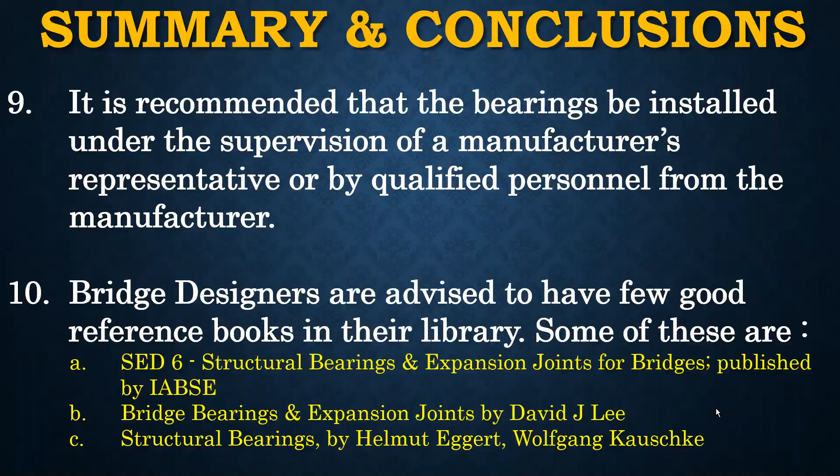Bridge designers are advised to have a few good reference books in their library. Some of these are given here: List SED 6, which is an IABSE document; Bridge Bearings and Expansion Joints by David Lee; and Structural Bearings by Helmut Eggert and Wolfgang Kauschke. So with this, I come to the end of my presentation.